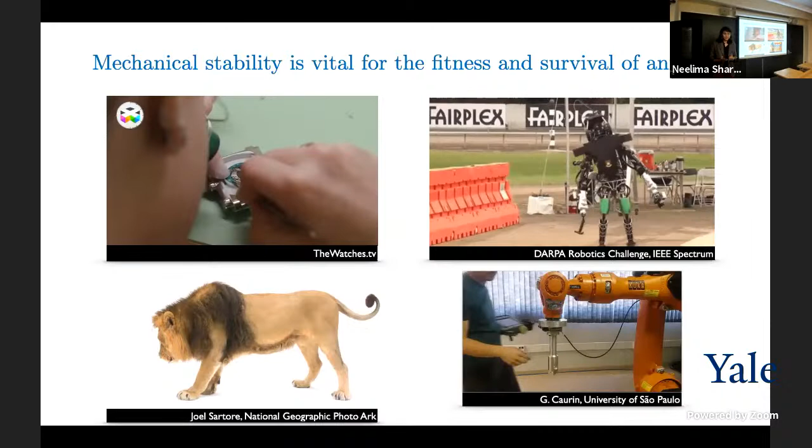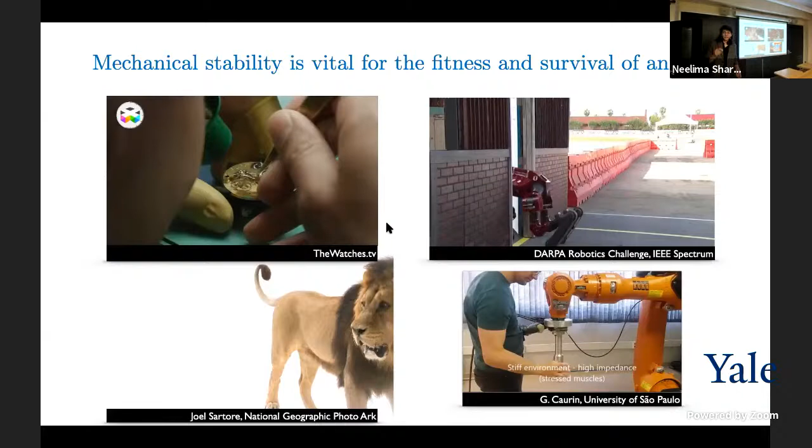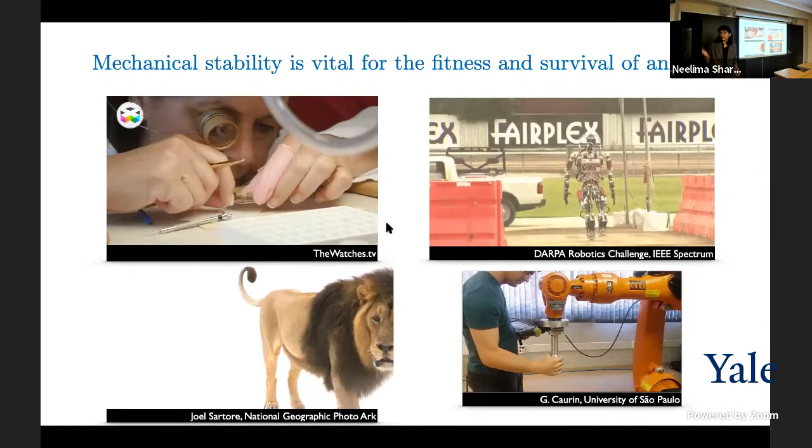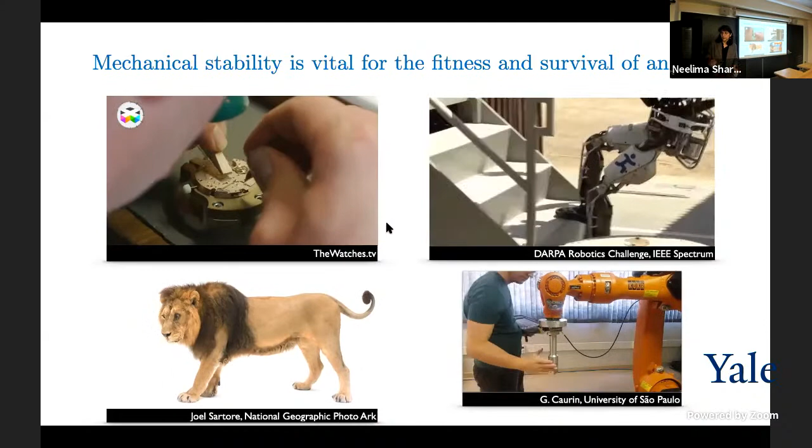I'll talk about how mechanical stability is vital for fitness and survival of animals. We know that humans and animals are extremely adept at dexterous tasks. For example, here we can see a person watchmaking. They are applying delicate forces, maintaining postures, or below, a lion just roaming around while maintaining a stable posture and not falling. On the right-hand side, we have robots, which have really fancy feedback controllers that have noise and delays much lower than what sensory motor feedback in humans or animals do.

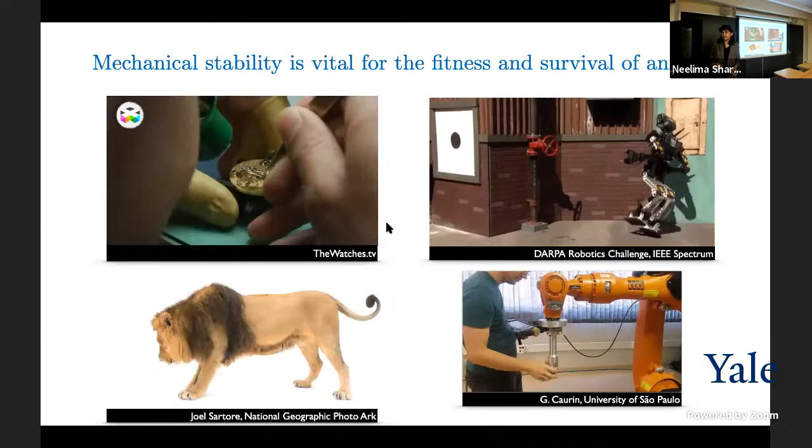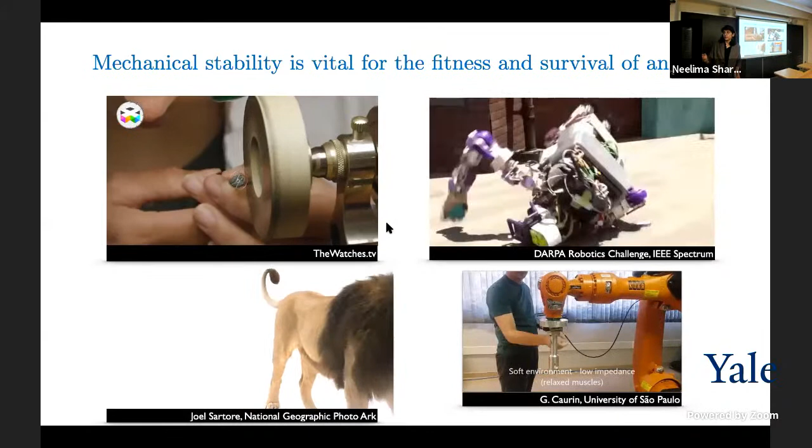And yet they are extremely inadept at dexterous tasks. For example, here you can see that they can't even stand still. It's very hard for them to hold things and maintain their postural stability. And in the video below, we can see that the robot goes into these high frequency oscillations when the person contacts the robot with a stiff posture.

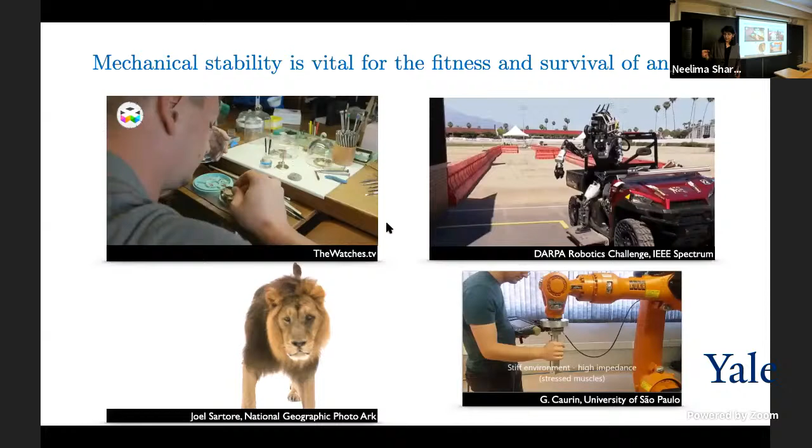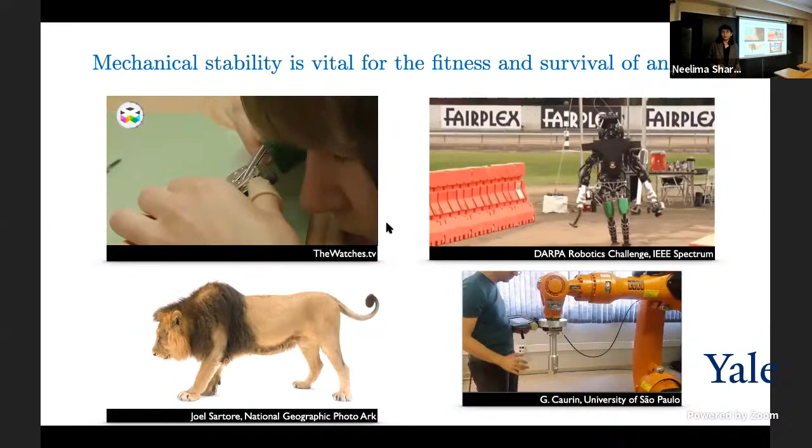So contact stability is a problem with robots. Maintaining postural stability is a problem with robots - something that we don't even think about when we are performing these different tasks. For example, walking is a no-brainer for us.

So we all know... where does the stability come from when animals are performing motor tasks? We can classify the body's responses into many different kinds, but I'll discuss three of them here. First is morphology.

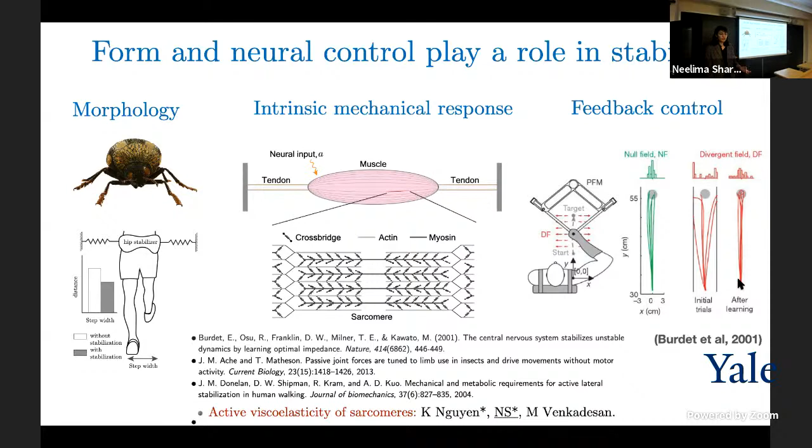So all these examples tell us that form and neural control play a role in the mechanical stability of motor tasks.

However, we ask the opposite question. In this work, we ask if stability plays a role in animal form and function. The argument leading me to this proposition is that animal morphology and neural control of that morphology are the first line of defense against external perturbations, because feedback, as discussed, is associated with noise and delays. And stable function is necessary for defining an animal's fitness and survival, which is under pressures of natural selection by evolution.

So we propose that open loop stability—by which I mean stability that does not rely on feedback, which is dependent on noise and delays—acts as a constraint and a driving factor that has led to the evolution of morphologies and of learning different motor control strategies for performing tasks stably.

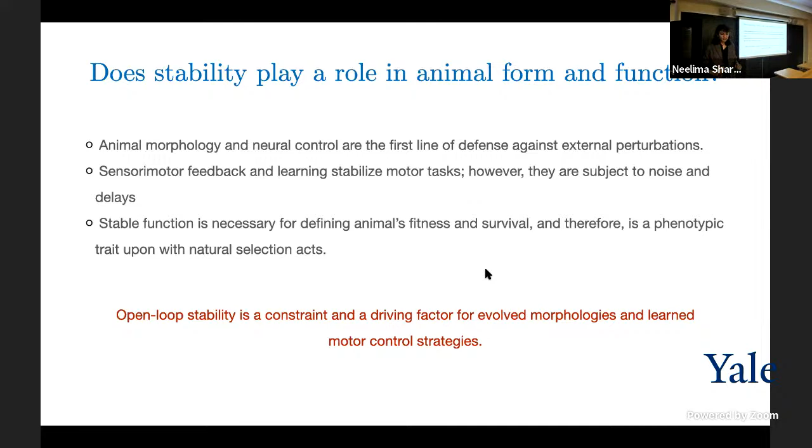I'm going to show this to you using two example studies. I've broken my title into two parts. The first part of my talk discusses the role of stability in animal morphology, and the second part discusses neural control and how that helps maintain stable finger posture when applying fingertip forces.

So in the first part of my talk: it's a common observation that small animals maintain a sprawling posture, having a wider base of support compared to their height, whereas larger animals such as elephants or lions are more slender when seen in front profile. This can be quantitatively characterized by an aspect ratio—simply the ratio of the width of the base of support to the height of the animal. So smaller animals have a large aspect ratio, whereas larger animals are more upright.

This is a common observation, but there has never been any data verifying whether there is a scaling relationship between aspect ratio and the size of the animal.

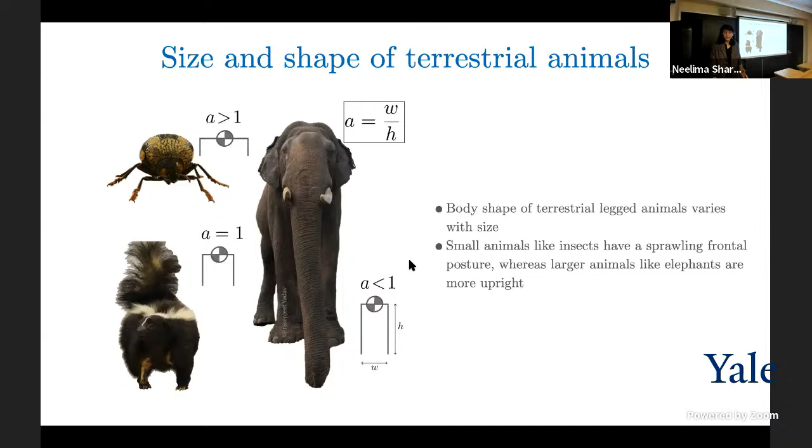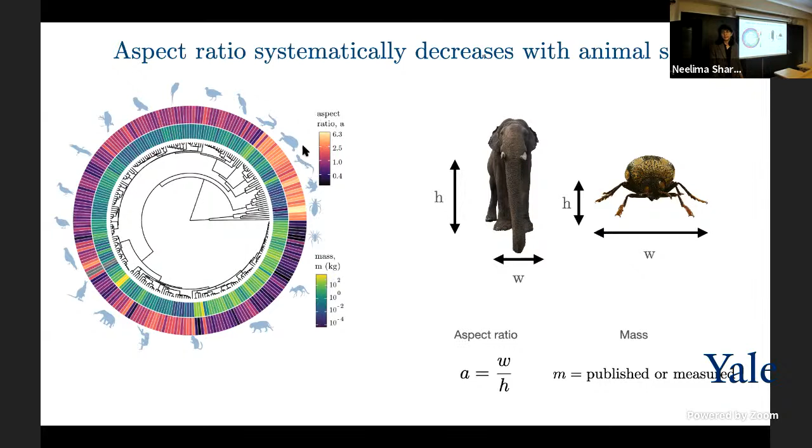So we went out and collected data for 366 animals, where we used frontal profile photographs of the animals to measure their aspect ratio by finding the base of support and height of center of mass. We also measured the masses of various animals. These are the different animals we collected data for, ranging from small insects to reptiles, birds, and large mammals.

And this is what we find. Aspect ratio plotted against the mass of the animal, which is a measure of its size, shows a trend such that aspect ratio decreases as the size of the animal increases. Aspect ratio greater than 1 suggests a sprawling posture, such as found in insects, and something smaller than 1 is a slender posture, such as found in larger animals.

So next, we probe what underlies the scaling of aspect ratio with size. The existing hypotheses that talk about the scaling, or why larger animals maintain an upright and therefore slender posture, rely on the stress hypothesis.

This says that to reduce joint torques or muscle stresses for large animals, they align their limbs closer to the ground reaction forces in order to reduce skeletal stresses needed to support their body weight. Smaller animals, on the other hand, maintain a crouched posture because they are limited by the power limits of their muscles, and they want to increase the stance phase duration, which can allow them to provide enough work for locomotion.

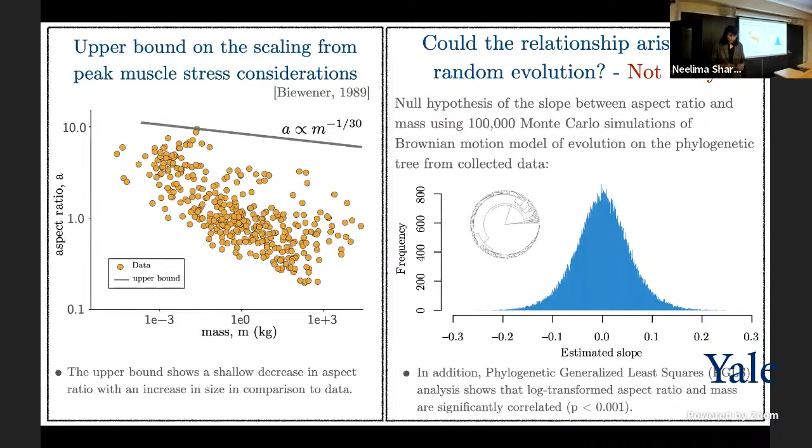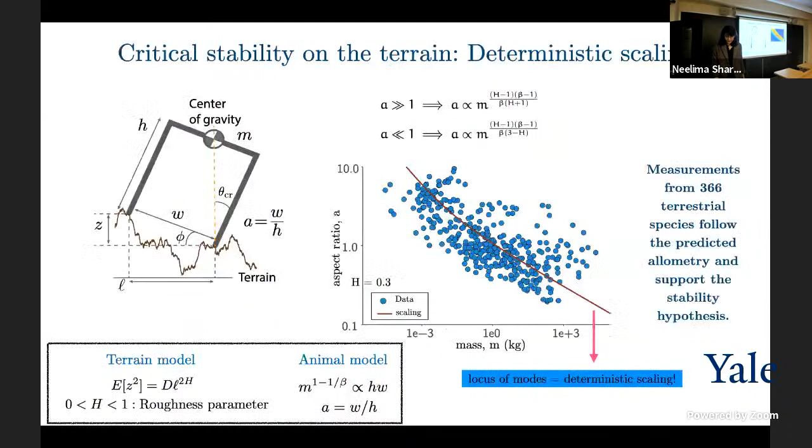Okay, so that brings me to the end of the first part of my talk, where I highlighted the role of stability in animal form. The second part of my talk is related to the role of stability in neural control.

The system of consideration here are index fingers. We want to study how finger stability is accounted for during precision grips. Here are examples of people doing precise tasks. They have to maintain their finger posture while applying precise fingertip forces.

There are studies which suggest that morphological features such as phalange ratios, a long thumb compared to the index finger, fat finger pads, and how the muscle tendon system is laid out are related to how you can perform dexterous tasks using your fingers.

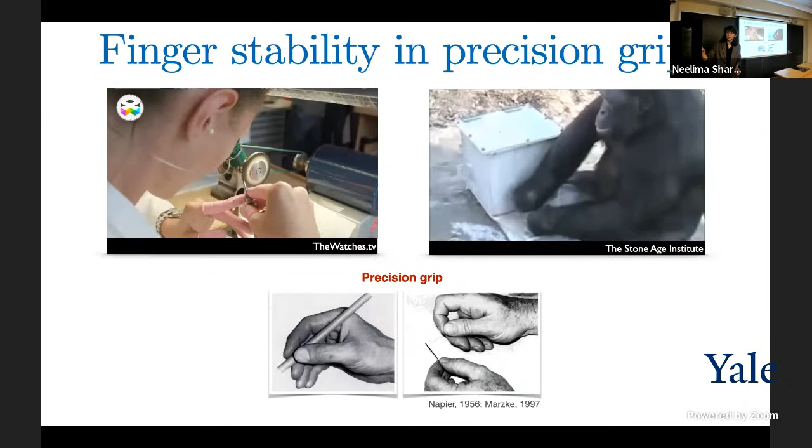However, other studies show that you can train a bonobo to perform precision tasks or become adept at tool making. Here's a bonobo named Kanzi, trying to find a banana. You can see he precisely holds the tool or thread in his hand and tries to break it open to reach the banana.

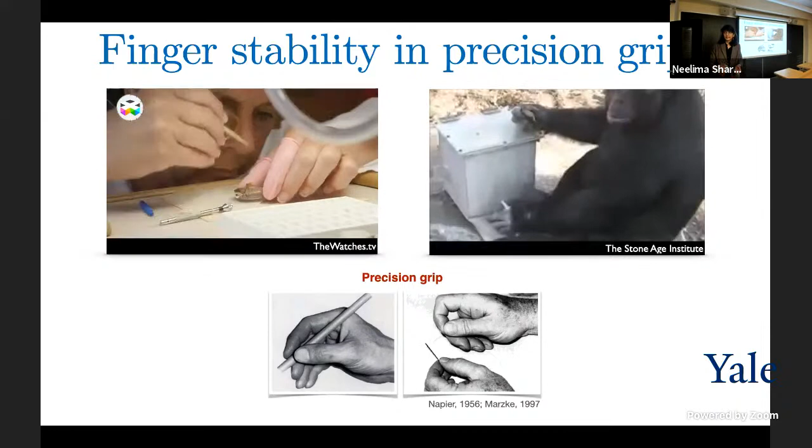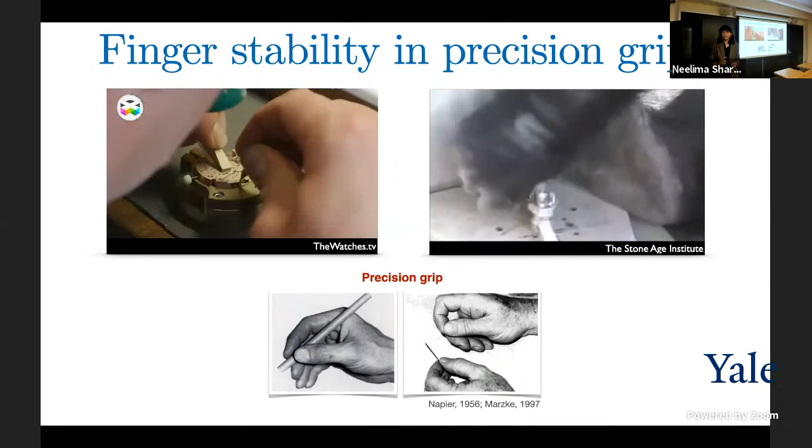So the point I want to highlight is that when you're precisely grasping an object, the posture of the finger is important, and the neural controller of the finger determines whether or not you'll be able to precisely grasp an object. That's what I'm going to talk about.

So one kind of instability that the finger suffers from when trying to apply fingertip forces is postural buckling.

Here is a subject producing high fingertip forces on the surface of a load cell. We ask them to produce as high forces as they can without any consideration for stability, and we see that their finger buckles, meaning it's not able to maintain its posture. The whole event of buckling takes around 60 milliseconds.

The rise of the DIP angle, the most distal angle here, with respect to time is exponential, and the time scale varies between 9 to 80 milliseconds, which is smaller than the fastest feedback delays in most cases.

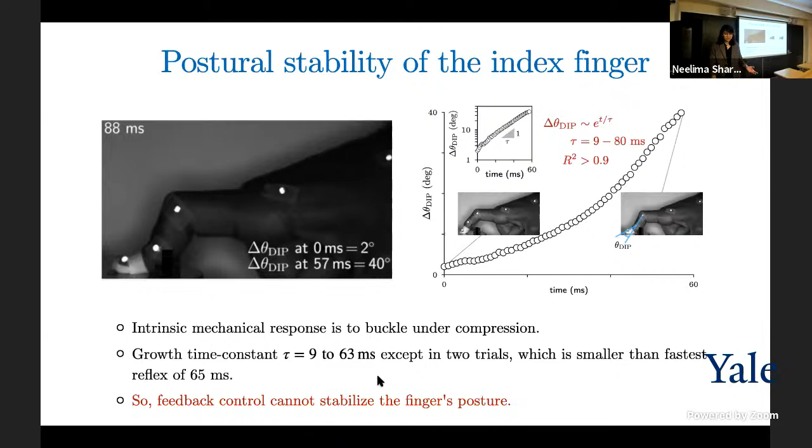This suggests that feedback control cannot stabilize the finger posture against buckling once you've started to buckle while producing fingertip forces. So if feedback cannot keep you stable during precision grasp, what is it that keeps you stable?

The muscle stiffness, which I talked about before as the first line of defense, is a potential candidate, because experiments have found that as muscle tension increases, muscle stiffness also increases. So it's possible that when producing really high fingertip forces, your stiffness has also increased, providing enough stiffness for postural stability.

That is the reason why you do not buckle all the time when precisely gripping an object, but it only happens occasionally, which could be due to motor noise or other effects.

So we test this using a numerical experiment. We construct a planar model of an index finger with 3 degrees of freedom, driven by 7 muscles, where activation of each muscle goes from 0 to 1.

The optimization procedure we run is to maximize the distal fingertip force Fy and find the optimal fingertip force and the optimal activation pattern of the 7 muscles that gives rise to this maximal distal fingertip force.

Here is a painting by Rembrandt, and I just want to highlight that they are looking at finger flexors, which are on this side of the hand and help you flex your index fingers. So this has historical importance.

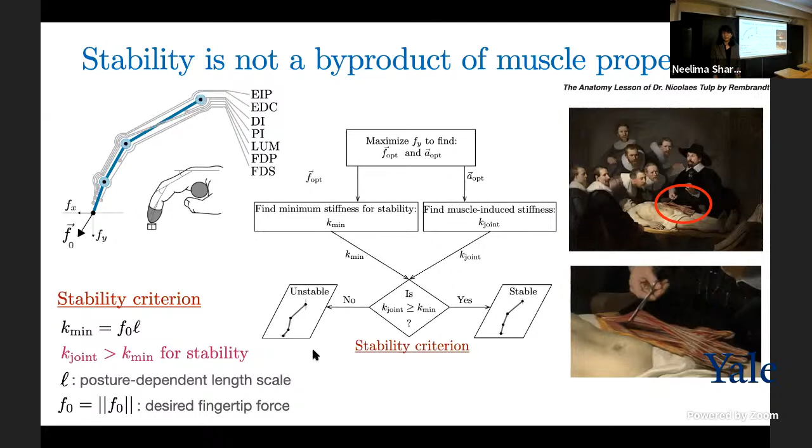We find these various numbers, and the muscle-induced joint stiffness is smaller than the minimum stiffness required for stability, which means our finger buckles and does not remain stable. This is the activation pattern associated with that.

So in the previous slide, I told you that neural feedback control cannot stabilize you. And now I'm telling you that muscle stiffness is also not able to stabilize you when you're producing maximal fingertip forces. So what is it? How do you remain stable when you're grasping an object? The answer could be that you rely on muscle stiffness to provide a stable posture. However, your neural control is designed to prevent you from accessing activation patterns that would lead to an unstable posture.

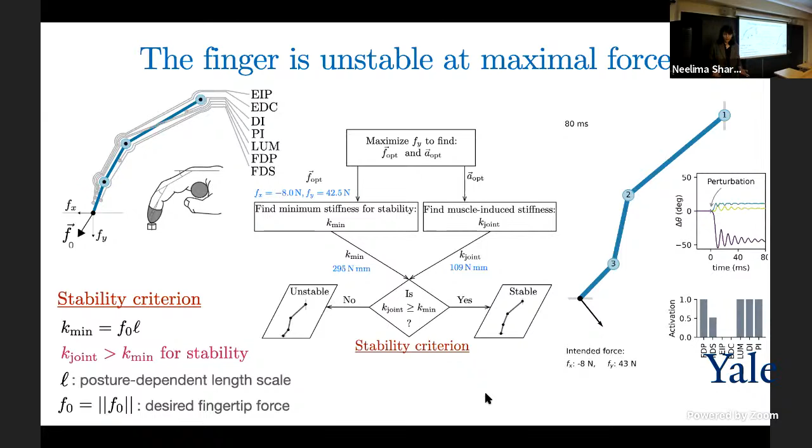So how do we test this? We perform an experiment where we call in subjects, ask them to produce as high a force as they can on the surface of a load cell, but they're not allowed to become unstable. So they have to produce stable fingertip forces. We give them 15 seconds, measure their fingertip forces, and measure activities from two flexors which help flex the index finger.

In the second condition, we attach a finger stiffening splint to the finger, which removes the constraint from the neural system to maintain a stable finger posture. We find that when we have stabilized the finger posture, people are able to produce much higher forces, and their muscle activities are also higher compared to the free finger case. This is data from 38 subjects, and we see that finger force as well as flexor EMG increases compared to the free finger.

We also do another condition with a half splint that keeps your distal-most joint free, and we see similarly that fingertip force increases and EMG increases, however not as much as for the full splint condition. So this experiment suggests that stabilizing the finger makes people stronger because they are able to access previously unstable activation patterns to produce higher forces.

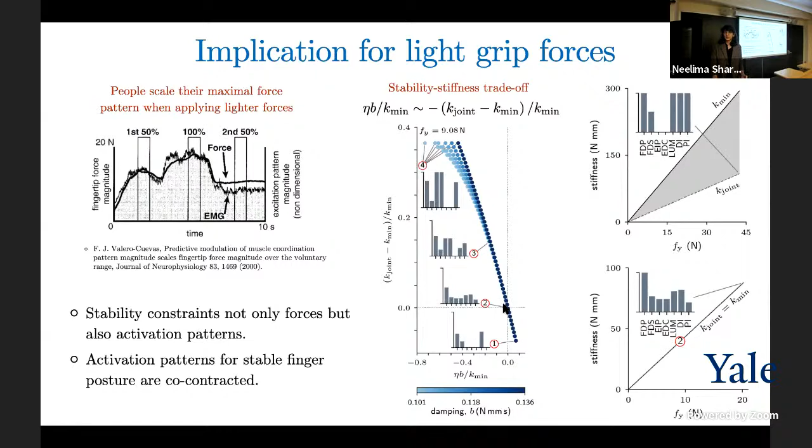This suggests that the stable activation patterns are co-contracted, meaning that if you have a joint and want to maintain a posture, you can co-contract your muscles—increase the activity in both the flexor and extensor to increase joint stiffness without changing the joint torques at all. This is what I'm trying to show through this figure: there is no joint torque about this joint J, however the stiffness can be modulated.

Now, from our experiments, we see that the splinted finger shows an increase in fingertip forces, and numerics suggest that the free finger must be co-contracted. This leads us to hypothesize that the splinted finger achieves higher fingertip forces because it is able to decrease the co-contraction associated with the muscles. So how do we figure out, using our experiments, whether or not this is true?

So this is what we do. For 16 subjects, we measure flexor activity as well as extensor activity when they are producing fingertip forces, exactly the same experiment that we did before. We invoke Valero-Cuevas's study where we find that people simply scale their activation pattern to produce lower forces. We know the forces people produce without the splint, and we scale it up to find the activation pattern associated with maximal forces with the splint, which is generally higher.

So if the activation pattern is simply scaled up, that means there is no change from linear scaling and no contraction. However, if the activation pattern is smaller than what linear scaling tells you, there is a decrease in flexor activity with respect to linear scaling, and in the opposite direction, there's an increase from linear scaling.

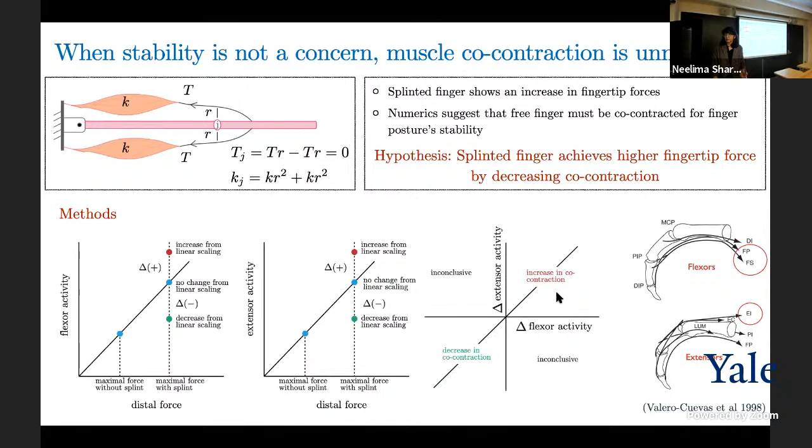So for 16 subjects, by measuring flexor and extensor activity, this is what we find. We plot delta of extensor, the deviation away from linear scaling, versus delta flexor, deviation away from linear scaling, and they lie in the third quadrant for both the two-joint splint, which covers the whole finger, and the one-joint splint. This shows that people are able to produce higher fingertip forces during the splinting condition because they decrease their co-contraction. The second point of this figure is that people who do not show a change in their co-contraction pattern do not show a large change in their forces when a splint is added to the finger.

So how do we think about this whole experiment? I propose this diagram, which we will come back to later also. If you have a force region, it is associated with stable and unstable regions. The unstable region is accessible only when a splint is present, which is also associated with a change in the activation pattern and is not simply a linear scaling. And this is the maximal force that you could produce without a splint.

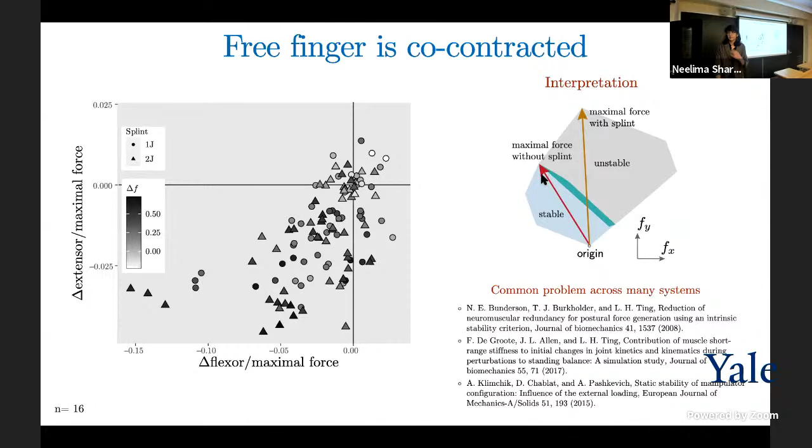So in summary, I have told you that contact forces are limited by the stability of the finger posture when you're producing fingertip forces during, let's say, a precision grip. The nonlinear elastic response of the muscle is responsible for contact stability, and the free finger is co-contracted, most likely to ensure a stable finger posture, because there are other non-co-contracted patterns that do not allow you to remain stable.

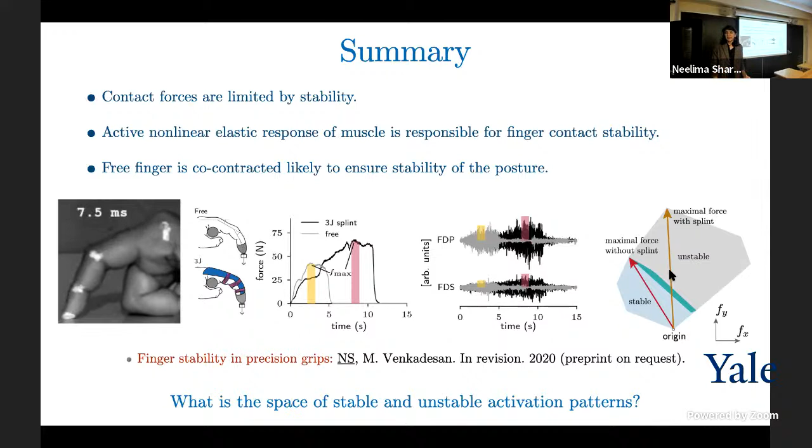So I've shown you this last diagram, which shows that there is a stable space and an unstable space, but what do we know about the space of stable and unstable activation patterns? This is the question we ask in the next chapter, which is related to the stability of tendon-driven systems.

So before I explain what stable and unstable activation spaces may be, first I need to figure out what the minimum stabilizing stiffness is for a given active mechanical linkage. The derivation I'm going to show you is not only applicable to a model of finger in contact, shown here, but is more general and can be applied to any active mechanical linkage network with compliant joints subject to holonomic constraints.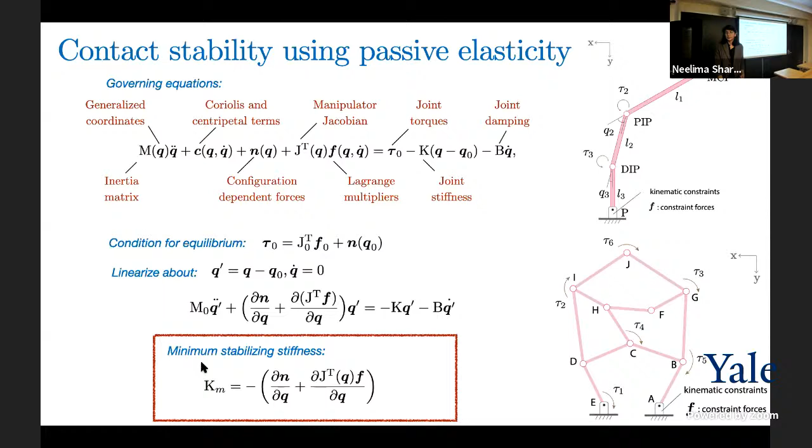So this is the force balance. It is the equation of motion of the active mechanical linkage, subject to certain holonomic constraints. The condition for equilibrium is given by this equation. Here, tau naught is the joint torque vector, related to fingertip forces and configuration-dependent forces in this manner. You can linearize it about your equilibrium posture to find this equation, which gives the condition for a minimum stabilizing stiffness, related to the partial of the configuration-dependent forces and the constraint forces in the system. So this is the minimum stabilizing stiffness matrix.

However, we are interested in understanding tendon-driven systems such as musculoskeletal systems. So we consider again an active mechanical linkage with any tendon layout, and how each tendon spanning the joint of your active mechanical linkage is associated with an activation A, as talked before, and this is related to joint torques linearly. R is simply the moment matrix of the muscle, and T is the peak tension of each tendon, and A simply scales them.

Each tendon has a stiffness associated with it, which is linearly related to the activation in that muscle, and we use a similarity transform of the moment arm muscle about the joints to find a joint stiffness matrix. If you want to maintain stability, you can pose an optimization problem where we minimize over a convex objective function, and this objective function could be anything of your choice.

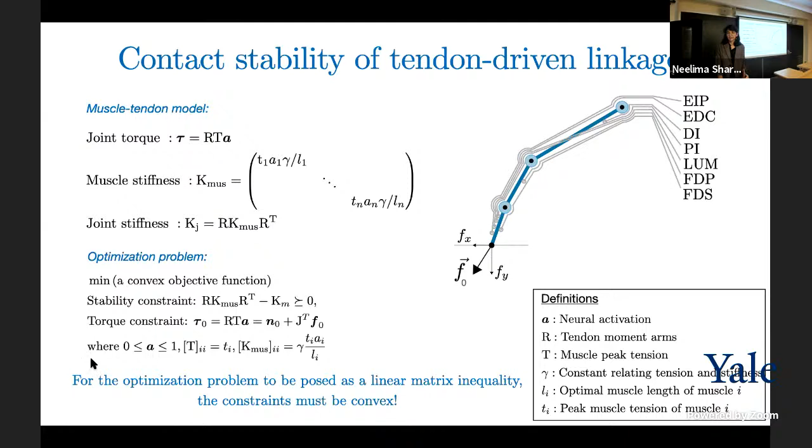What's important is that we satisfy these torques and stability constraints in order to remain stable and maintain equilibrium when we are producing fingertip forces. However, this problem can be posed as an optimization problem only when we know that the constraints are convex in nature, which is what I'm going to show you next.

Definition of convexity: if I have two activation patterns that satisfy a condition, I want any arbitrary activation pattern on the line joining these two activation patterns in some high dimensional space to also satisfy that condition. So I consider the first condition, which is that my activation vector has components which go only from 0 to 1. This gives me a unit hypercube, an example in 3D for 3 muscles, where each side is one muscle activation.

It goes from 0 to 1, and the whole cube space tells you all the activation patterns that are possible. However, we also want equilibrium, and that imposes a linear constraint on the activation patterns allowed to you. It translates into a plane which intersects the total activation cube and passes through the origin, because we have gotten rid of the configuration dependent forces.

In addition, we consider the stability constraint, and it intersects this equilibrium plane. It is another plane which intersects the equilibrium plane and divides it into stable and unstable regions. So unstable, stable, marginally stable, and equilibrium regions are all convex in nature, and you can visualize them using a 3D space for 3 muscles, for example.

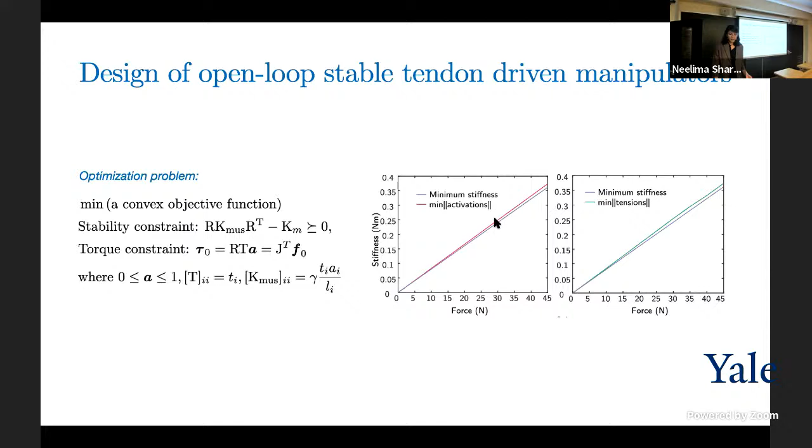So that's the design problem of open loop stable manipulators. However, understanding that there's a stable and unstable space also has consequences for understanding the motor control of fingers.

Now we know that activation patterns are inherently noisy, and the minimum intervention principle states that when you're performing a task, there's a control space which is in general higher dimensional. For example, here I'm showing an activation space to fingertip force mapping. The fingertip force is a 3D vector, and the activation space is a control variable, which is a 7D vector, meaning the mapping is associated with a 4D null space.

And the way motor systems achieve this task is to reduce the variability in the control variable: they channel the variability of the control variable in the null space from the control variable to task mapping, and reduce it in the task relevant subspace. This is an example of what I just said.

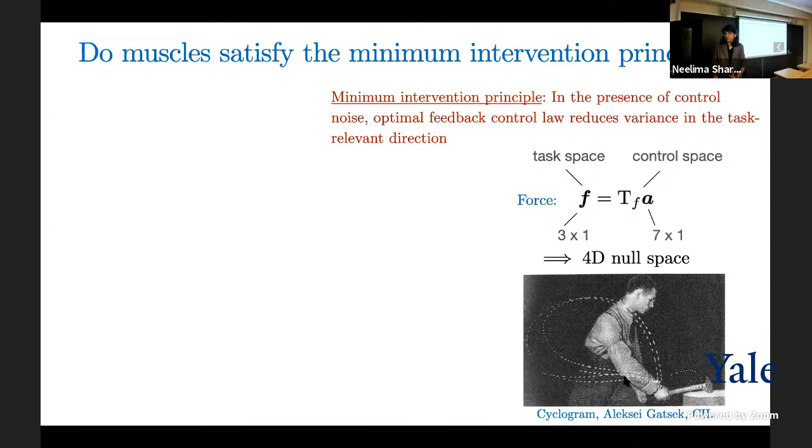For example, if you want to hammer a surface, you want to make sure that you're hitting the nail all the time. However, your joints can take various different configurations. But the endpoint of the hammer should always hit the same place. This is what people do, and this was proposed by Bernstein long ago.

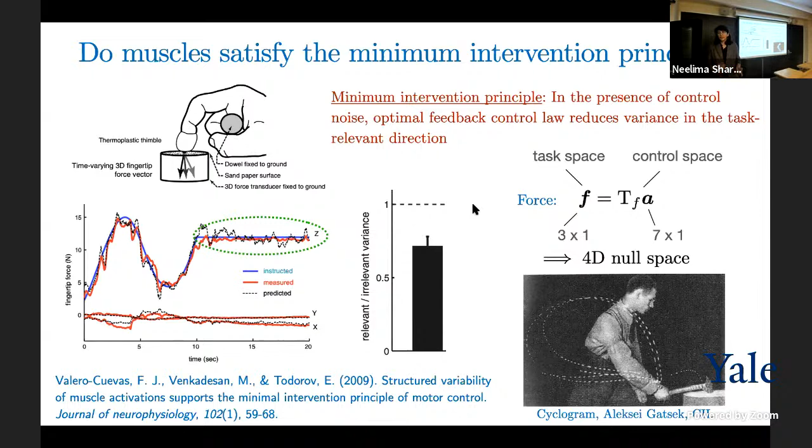So this is posture to endpoint mapping, but a study by Valero-Cuevas and Madhu has shown this is also true for muscles. For activation to force mapping, we see that variability in muscle activations is channeled in the irrelevant direction, the null space, compared to the relevant direction. You can see this because the ratio is less than 1. If it was random noise, you would have seen a value equal to 1.

So now, with the understanding we've developed on what's necessary for applying fingertip forces - equilibrium condition and stability condition - we include this in the task description and ask whether motor control channels variability in the null space of activation to stiffness mapping and activation to equilibrium plane mapping. Here eta is the relevant to irrelevant variance, and for various task relevant variables such as equilibrium, force, or a combination of these, we find that the ratio of relevant to irrelevant variance is consistently lower than 1, which tells us that motor control is paying attention to stiffness or equilibrium and channeling variability in the null space to these task relevant variables.

We used the same data that the study used. It was generously provided to me by the study authors in order to run this analysis.

So in summary, we have found that stable and unstable activation spaces are convex. They are separated by a marginally stable hyperplane, and because they are convex, this allows us to pose the problem as an optimization problem, which can be solved using standard convex algorithms. We find that muscles exhibit the principle of minimum intervention when we consider the task description to contain all equilibrium, stiffness, and force conditions.

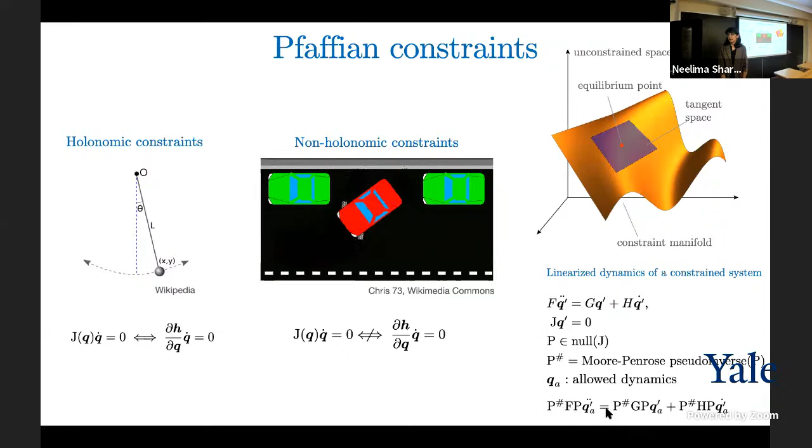Now, dealing with a general constraint system subject to holonomic and non-holonomic constraints can be done by projecting the dynamics on the constraint manifold. So if I'm interested in the linearization of my dynamical system, I find the equilibrium point. There's a constraint which determines the manifold, and the tangent space to the constraint is where my linearized dynamics live. This is written mathematically here: P is the null space of my constraint, and a projection of the dynamics on the constraint tells me what my allowed dynamics are.

So for a general active mechanical linkage subject to holonomic and non-holonomic constraints, it is simply a mass spring damper system with the presence of constraints. We can project it on the constraint manifold, pose it as a quadratic eigenvalue problem, and solve for the eigenvalue eta. Now, we find that when the system has symmetric stiffness and damping matrices, but is subjected to holonomic constraints...

...then you can write the linearized term due to the holonomic constraint as a potential, which is related to the constraint forces, and it gives rise to a symmetric stiffness-like matrix because it can be expressed as a potential.

However, in the case of a non-holonomic constraint, you cannot show that the constraint term is related to a potential, and therefore, in general, it gives rise to an asymmetric matrix when you do a modal projection on the eigenvector that you may have either found through experimental observation or through application-driven selection. This has consequences for what the eigenvalues can be when they are moving from the left half plane to the right half plane.

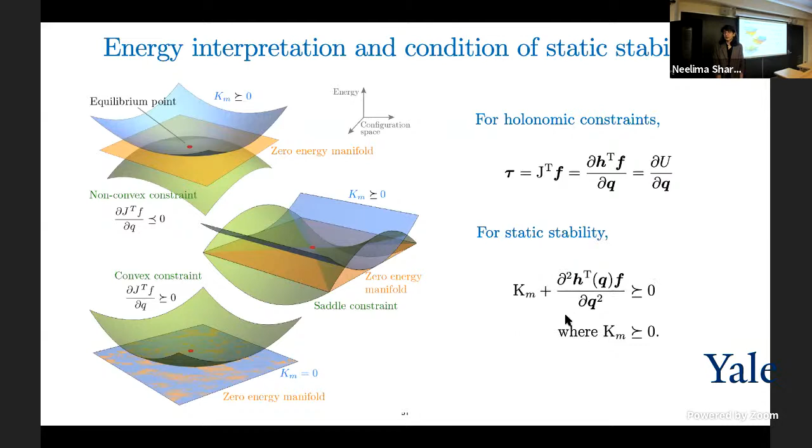Okay, so in summary, what I've just told you is that active mechanical linkages with non-circulatory stiffness and damping, without any, and subject to holonomic constraints can only destabilize by static buckling. However, the same mechanical linkage, but subject to non-holonomic constraints, can either exhibit static buckling or flutter instability. These analyses can be extended to other systems with gyroscopic, circulatory, feedback, stiffness, and damping terms, which will in general be asymmetric matrices, and therefore can be broken down into symmetric and asymmetric terms and analyzed further for what kind of instabilities may exist in the system and how to stabilize them.

So that brings me to the concluding slide. I hope that I have convinced you that the need for mechanical stability is important and has consequence for both animal morphology, such as we saw in the scaling of aspect ratio with size of the animal, for maintaining lateral stability on uneven terrain, and that neural control learns strategies which keep you stable in tasks which are extremely important, such as precision grasping in humans.

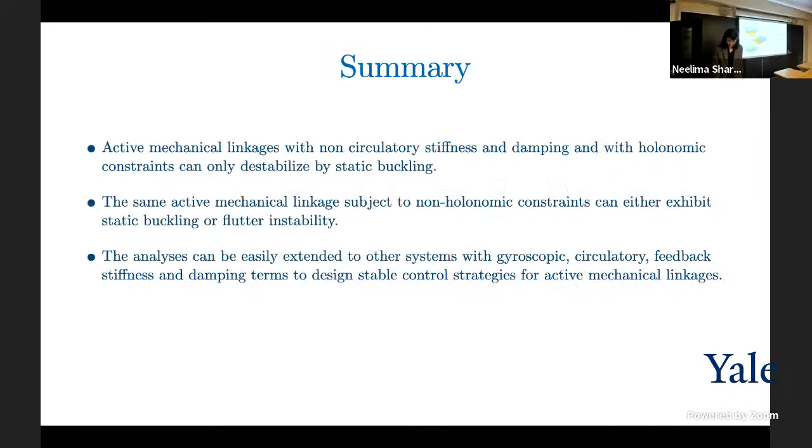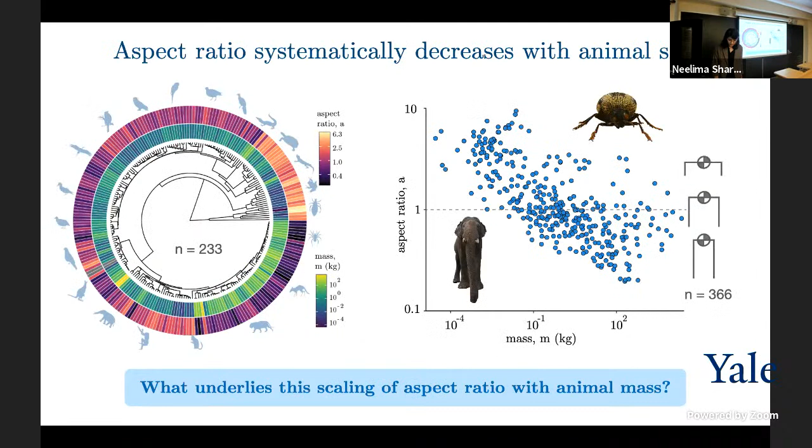Yes, please. In the first part of your talk, there was a discussion about Gaussian. The theory is Gaussian, but the data that you plotted for aspect ratio versus mass didn't. So I'll just ask the 3 questions and then you can answer. The data itself, it wasn't clear whether that had higher order moments, and if it does, why. So that's one question. Did you analyze the statistics of the actual data in this figure, and are there more than 2 moments?

That's the first question. The second question is about the study with finger stiffness. When you added the splint, it just occurs to me during the Olympics, weightlifters, all the athletes, they put braces on their knees, their elbows, and so forth. And the question is, is that cheating? So that's the second question. And if so, how, and how would you deal with that?

Results. Number three was the last part. You saw in the case of holonomic versus non-holonomic constraints that you had either a static instability, a buckling instability, or the coexistence of flutter versus buckling. It occurs to me that that is a statement of what's called exchange of stabilities for generalized eigenvalue problems. I just wonder if you wanted to comment on how that connection is made. So those are my three questions. Thanks for your talk.

Okay, so the first question is if I've analyzed the higher moments in the data in this figure, and the answer is that I haven't. What happens is that Z, or the terrain height perturbations, are Gaussian. The distribution of terrain height perturbations is Gaussian. However, what we are interested in is the absolute value of this distribution, which leads to a transform that gives me a half normal distribution of the height perturbations with respect to a certain value L. I haven't analyzed if there are higher moments, and I haven't thought about how I would address this question. Okay, I will think about it, and maybe we can chat later.

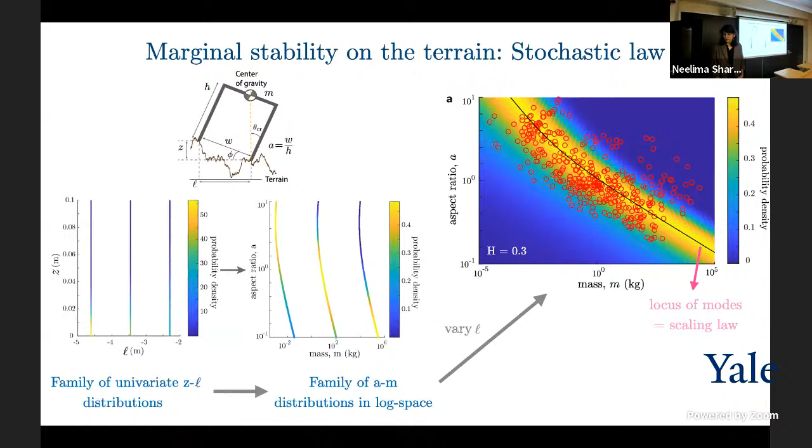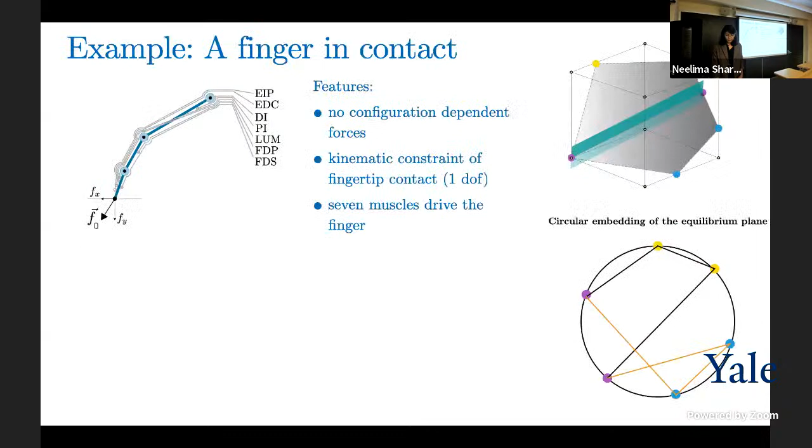Flutter versus buckling is exchange of stabilities. Yes, so I have thought about this. I want to move the slide. Just a second. This is right. Yeah, so if you have holonomic constraints, you can either become unstable by a pitchfork bifurcation, or a transcritical bifurcation, or there is one more. However, the other one is an Andronov-Hopf bifurcation.

So can you actually reframe your question in other words? What would you like me to comment on? There is exchange of stabilities in the sense that the eigenvalues change there. For example, in transcritical bifurcation, there is exchange of stabilities in terms of which eigenvalue becomes unstable after a critical buckling load. And there is exchange of stabilities in the sense that the system is stable when it's in the left half plane versus unstable when it's in the right half plane. So if you can just repeat your question, that will help me a lot.

Just normally in the generalized eigenvalue problem, standard procedure is to assume exchange of stabilities. And that procedure then assumes that if the real part of the growth rate is 0, then it implies that the complex part is 0. Yes. That... I just... that in order for that to exist, there's an adjoint eigenvalue. And so I'm just wondering if you have a comment about the relationship between that and the imposition of constraints, because you get two different results depending on whether you have holonomic versus non-holonomic constraints.

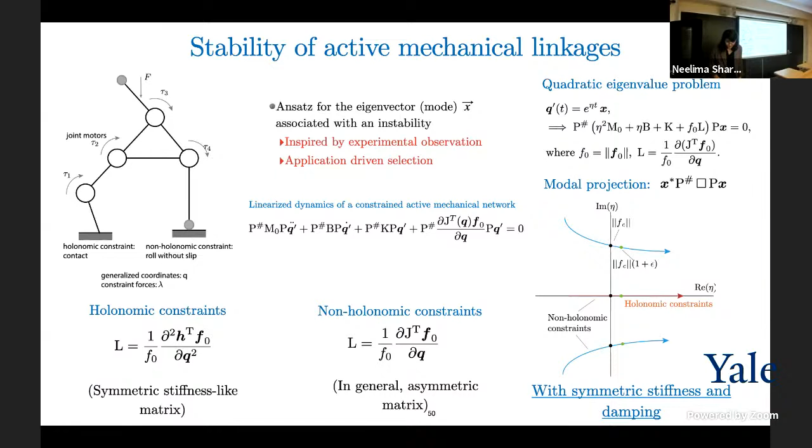I don't want to stay for the whole closed session, but maybe I could make a comment or two when that starts. Oh yes, if I'm allowed to. Oh yes, I'm afraid—please do, yes. Hello Andy, please do, yes. You have, okay, the...